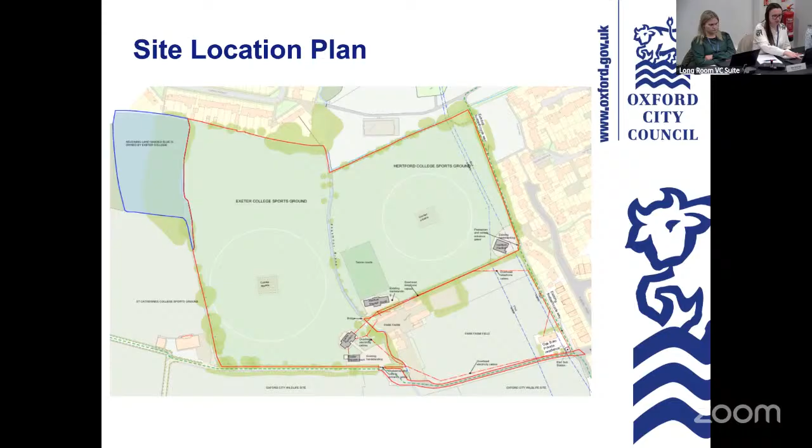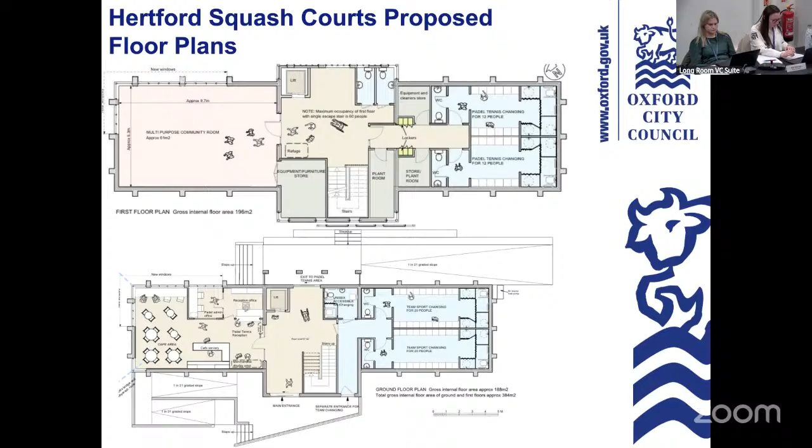So now coming to the proposed floor plans for the Hertford squash courts. The building is proposed to be refurbished with the squash courts being removed and replaced with a cafe, changing facilities, sports hub reception area and community space.

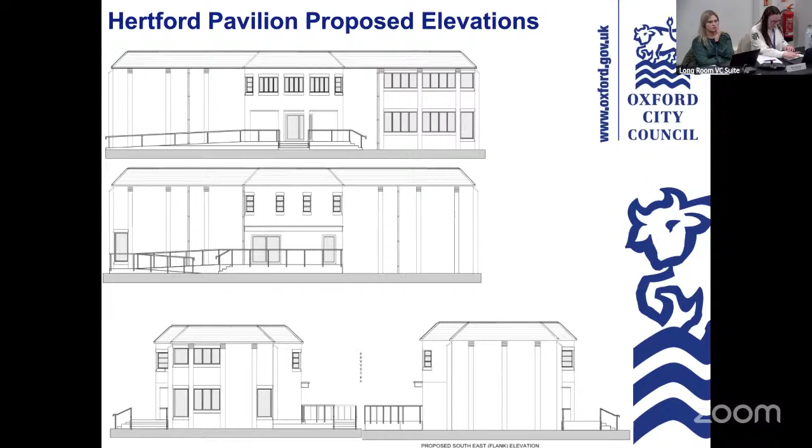And these are the elevations for the same building, with the only new additions being new access steps and ramps proposed outside.

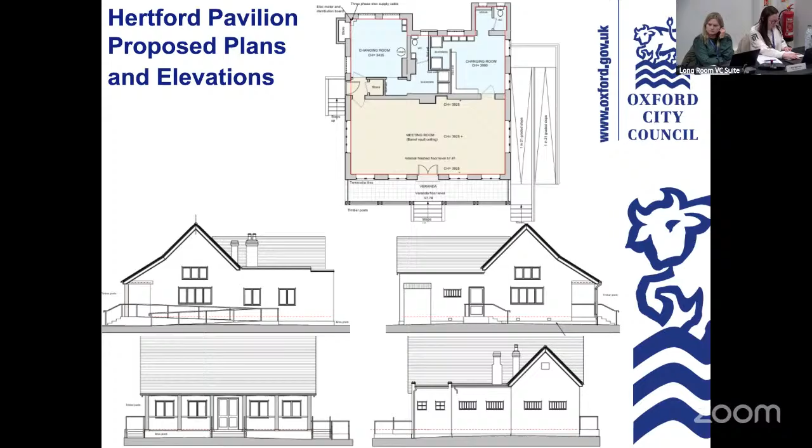These are the proposed floor plans and elevations for the Hertford Pavilion, which is to be refurbished with no alterations proposed to the internal layout nor the use of the building. Ramps and steps are proposed, as well as existing fenestration restored.

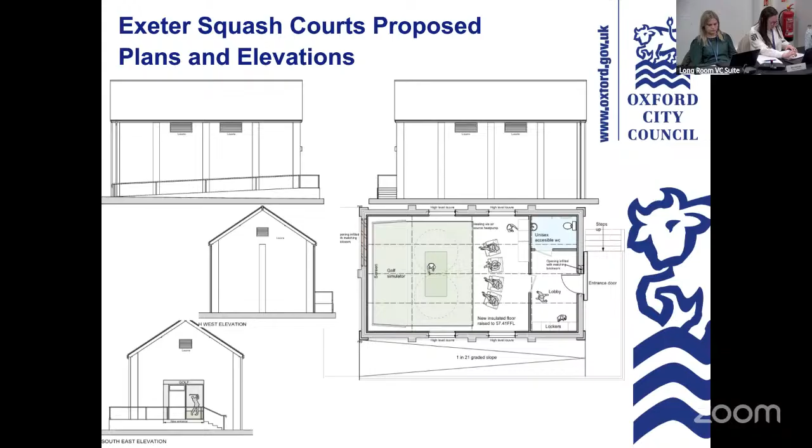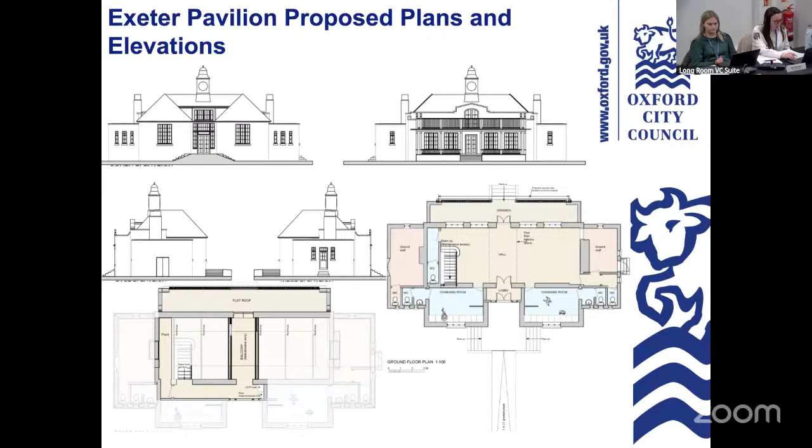Again, ramps and steps are proposed and the existing fenestration would be restored.

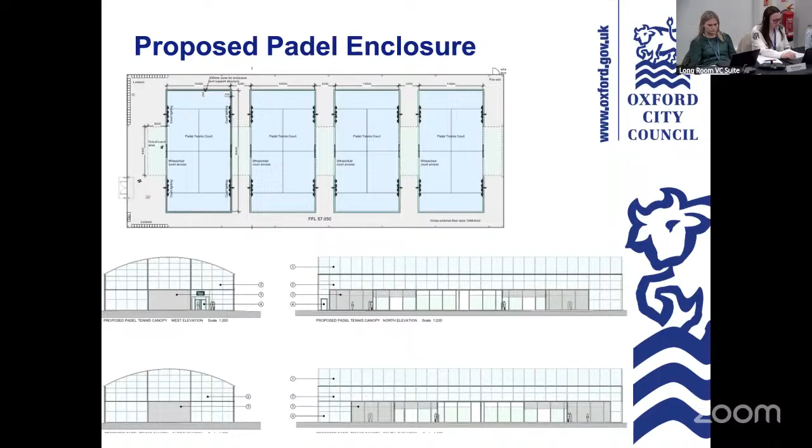The walls and roof of the enclosure would be clad in green polycarbonate sheets.

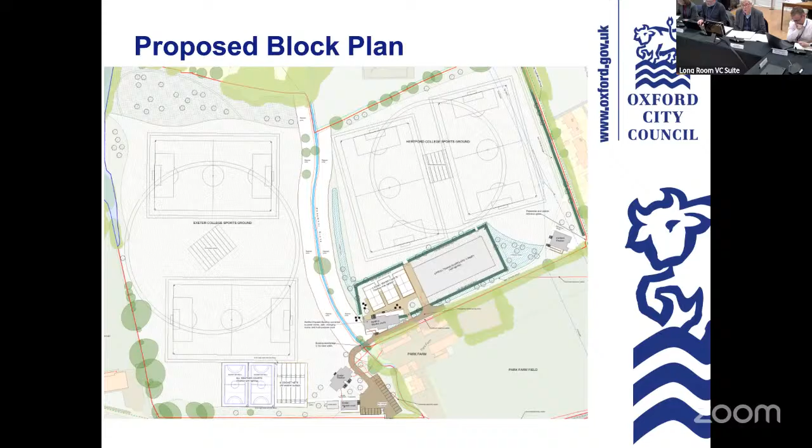So that we have before us a motion to accept the officer's report, i.e. to refuse the application. Could I ask all those in favour of the motion to raise their hand? Okay, that's four.

So, Councillor Henwood, you abstained.

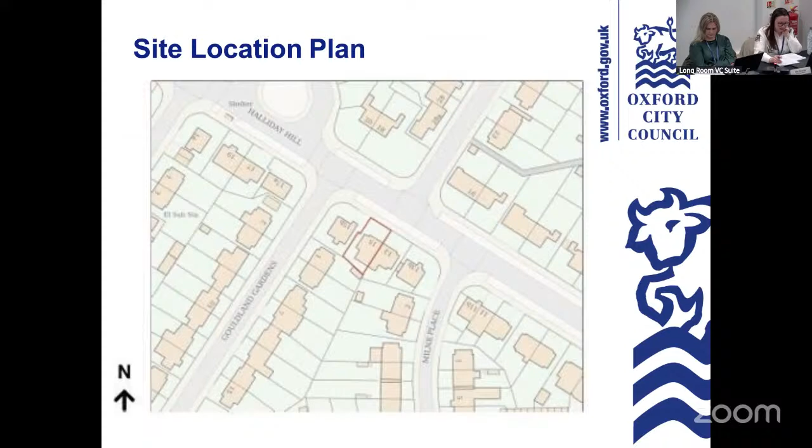These are the existing floor plans showing the ground floor on the left and the first floor on the right.

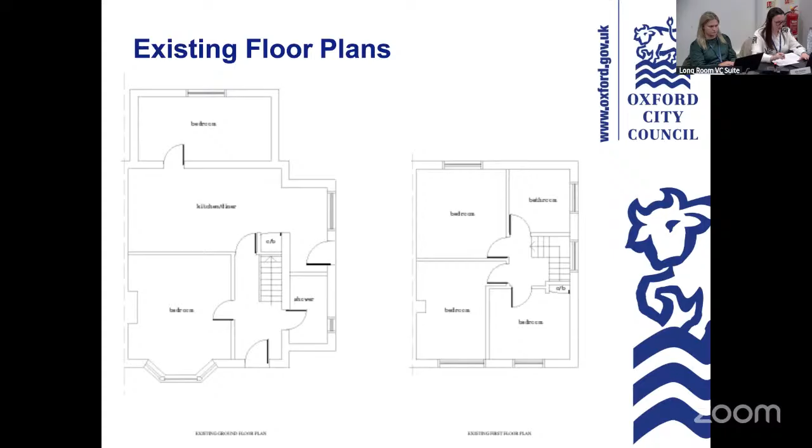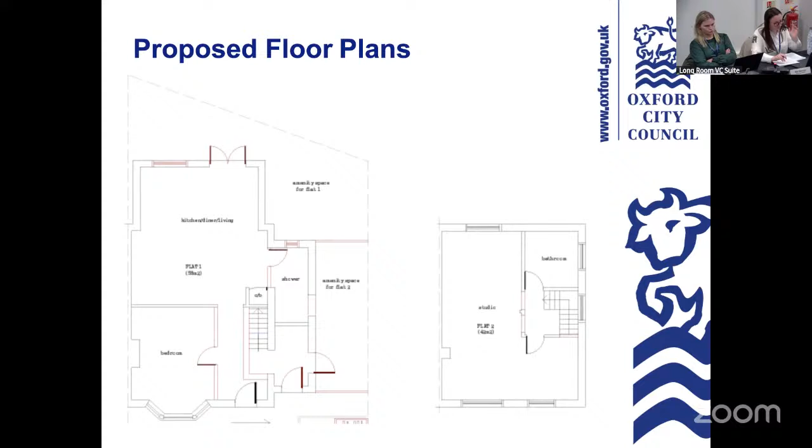These are the proposed floor plans. On the left, on the ground floor, we've got a one-bed flat proposed with private amenity space accessed from the rear. The second flat, located on the first floor, would be accessed at a new secondary door proposed within the front of the existing side projection, and this flat has private amenity space to the side.

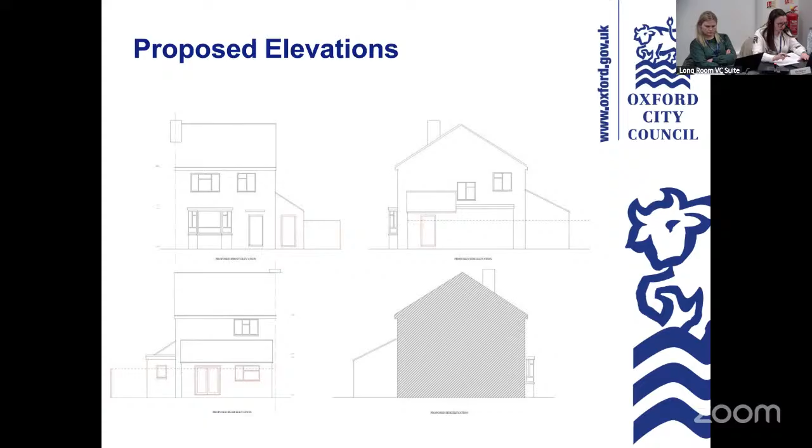In summary, the proposed development is acceptable in principle, providing an additional dwelling, and both dwellings would meet internal and outdoor space requirements, with the design not causing any detrimental harm upon the character and appearance of the dwelling itself, nor the street scene of Halliday Hill.

The proposals would not cause any detrimental impacts upon the amenity of any neighbouring dwellings, nor would the proposals cause any impacts in regards to highway safety, vehicle and bicycle parking, bin storage, drainage, ecology, nor land quality. As such, the proposals are considered to comply with the relevant policies of the Oxford Local Plan and the NPPF.

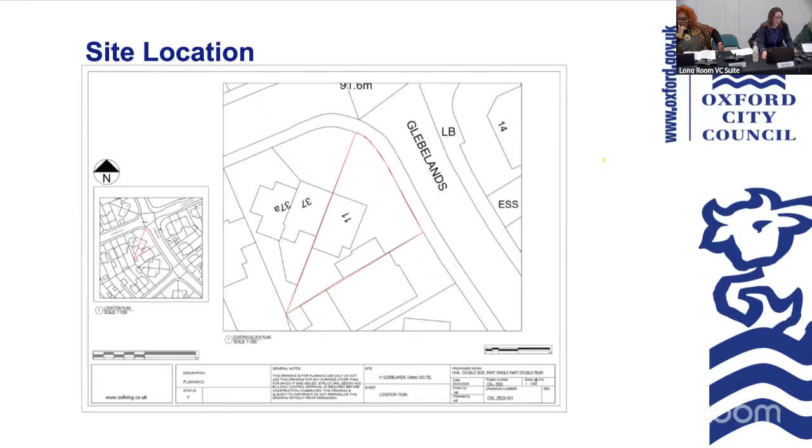The property was originally semi-detached. However, the other half of the semi-detached pair, 37 Coverley Road, has extended with a two-storey side extension, and this is now numbered as a separate dwelling. As such, the application is now part of a short terrace of 3.

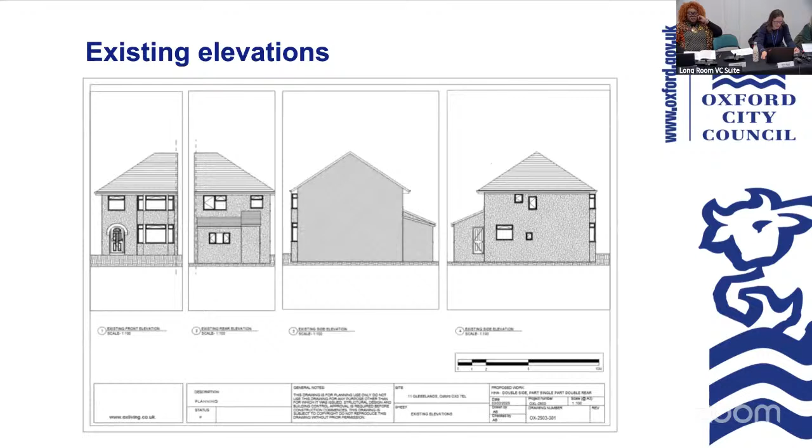The 2-storey side extension will be clearly visible from the street scene and would reduce the openness currently available between the site and 9 Glebelands to the south side. However, consideration has been given to other corner plot dwellings in the area which have similar orientations to the road and placement within their plots, and many properties have extended to the side in a similar manner, including the attached dwelling at 37 Coverley Road. Therefore the proposal is not considered out of keeping with the character and appearance or wider context of the area and would be in accordance with development plan policies.

The 45-25 guidelines have been applied in relation to neighbouring amenity, and the proposed extension would not contravene this code of practice. Therefore it's considered the proposed extensions would not result in loss of light to neighbours.

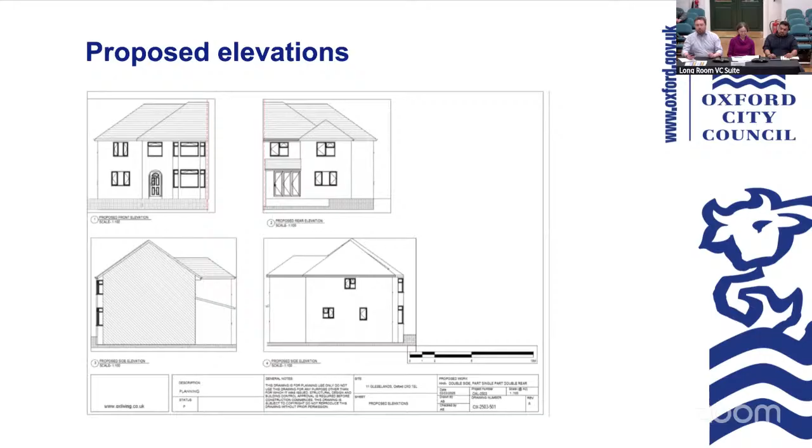My name is James Henton, I'm a resident next door to the property at 11 Gleeblands. We feel this is a huge overdevelopment of the site for a number of reasons. We believe this double-storey extension will affect the light coming into the back of our property due to how far the overall property sits in the plot. It sits very far back, so the front garden is huge but the rear garden is very small. We believe having 6 people living in this property with such a small rear garden creates a courtyarding effect for 5 properties backing onto this garden. We feel having this small amount of space for 6 people, let alone the 8 bedrooms proposed on the plan, would be unacceptable and not create enough amenity. There are 6 bedrooms listed, but 8 bedrooms are going to be within this proposal, so we feel this is a way for the property developer to get through additional bedrooms without effective planning under the sui generis guidelines.

All of these bedrooms will also have ensuite facilities. Those showers will back onto our bedrooms on our adjoining wall. We feel that even with sufficient noise reduction, this would still cause big disturbance to us as residents. Also, as these all have en suites, this is an irreversible plan which can never go back to a family home should they want to sell in the future.

I'd like to point out that a 5-bed plan has been submitted and approved without these additional extensions, and would be more in keeping with the neighbourhood and residents. I believe it's not necessarily about the process you follow, it's how you make your customer feel. We have a 300-person signature petition against this application, and I feel ignoring the community of Lye Valley is a big mistake.

Looking at Gleeblands on its own, both number 5 and 8 have already been approved for 8 and 9-bed properties and are currently inhabited. Number 11 and number 17, currently under review, given these were 3-bed properties, in 150 yards you are changing 12 bedrooms to 32. I believe that is completely unacceptable in terms of amenities for the local community, traffic, drainage, and everything else. Thank you.

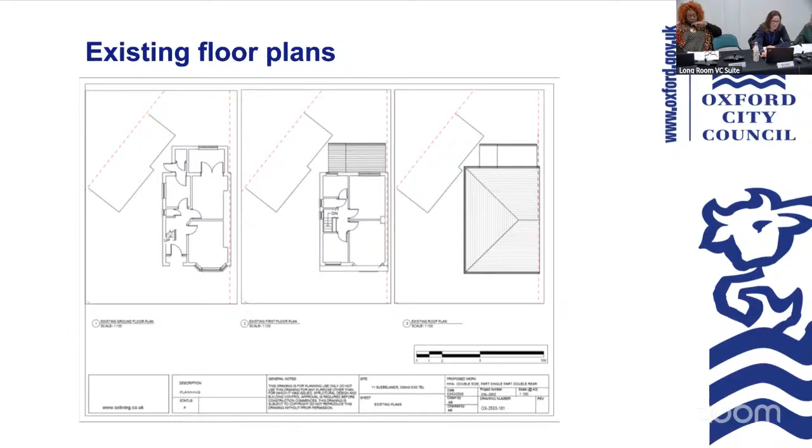Do you want to come back on that one, Mary? The current application is for a residential extension. There was a previous extension for a small HMO, but this current application hasn't been implemented yet. So this current application is for a residential extension. The other areas in the house are extended as existing: living room, kitchen.

Chair, just to come in. I think you're talking about that proposed floor plan, where there are bedrooms shown on the first floor and one on the ground floor, and then there's space that's not demarcated. Is that the concern? They don't have to specify what's actually going in those rooms, but one would expect that they're not bedrooms, so it's like living room, kitchen, diner. I would have thought the applicants... they're online, isn't it? You can ask that question if you see fit.

The point we're trying to make is that this is a C3 dwelling house at the current time. Although it's got planning permission for an HMO, that has not been implemented as yet. Therefore, we're looking at the extension itself here and not the use of the property. If the property later wants to be used as a C4 HMO, the applicant will need to apply for that change of use.

Do you want to come back, Simon? I don't understand that. Does that mean nobody will be able to live in it? No, that doesn't mean nobody will be able to live in it. At the moment, if they extend the property, if this planning permission gets granted and they build this extension, they will have to use it as a C3 dwelling house. That means used by a family that could have 6 bedrooms with en suites.

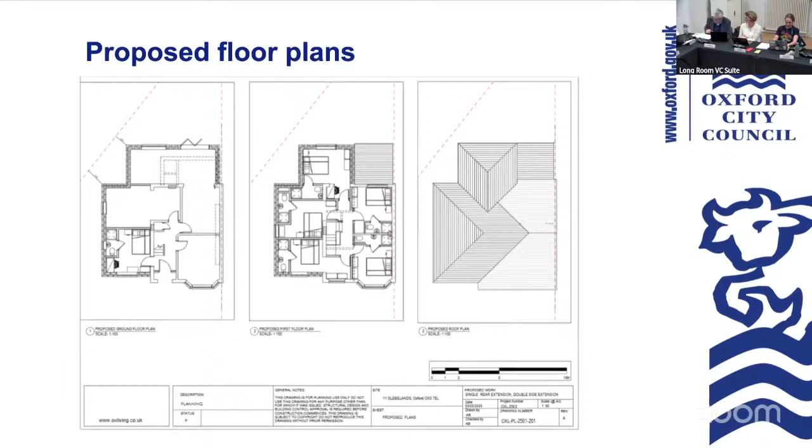I did have a question about the HMO thing. Could I just quickly check, is the number of HMOs in a given area a planning issue or a licensing issue? I don't believe it's a licensing issue, because the license goes with the property, and whether the property can be used as a HMO depends on meeting a certain set of standards. The number of HMOs in the area is a material planning consideration, because we have a policy controlling that.

But that applies when you're considering an application for a HMO. The important thing to remember here - and maybe we can seek clarification from the applicant to confirm - is that the property is currently in use as a C3 dwelling house. If at such time you're looking at the change of use of the property to a HMO, that's when you consider the saturation policy.

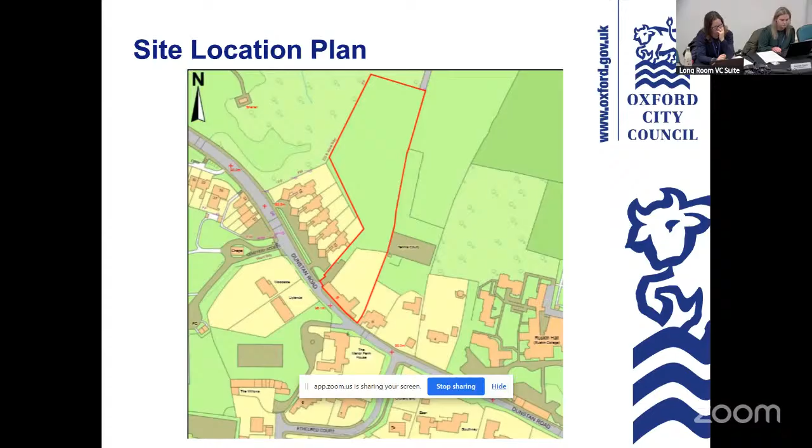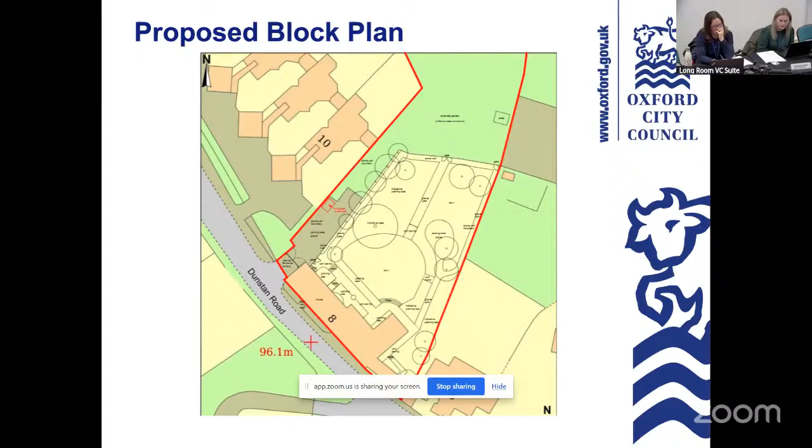So this is the block plan. Here to the left of the main dwelling, or to the northwest, is where the proposed bike shed is located. To the west of the main dwelling, still within the red line boundary, is a vehicle access gate, and the proposed shed is located behind this gate to the northwest side of the site boundary, and the shed would be accessed via this gate.

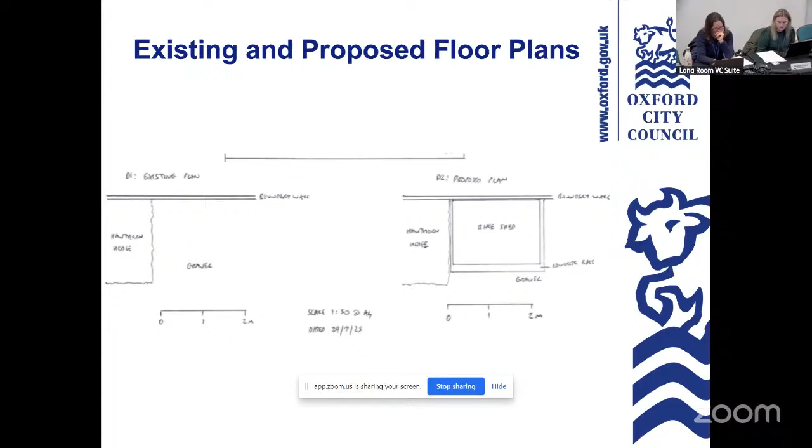The main considerations of the proposal were the design and heritage impact and compliance with cycling standards. The structure wouldn't be visible from Dunstan Road nor the listed building unless the access gates were left open. It could be easily removed if required, and it's of a very modest design. Therefore, we're of the view that the design is acceptable and that it wouldn't impact the Grade 2 listed heritage asset opposite. Our heritage team have reviewed the proposal and are also in agreement that it would not impact the listed building nor the conservation area.

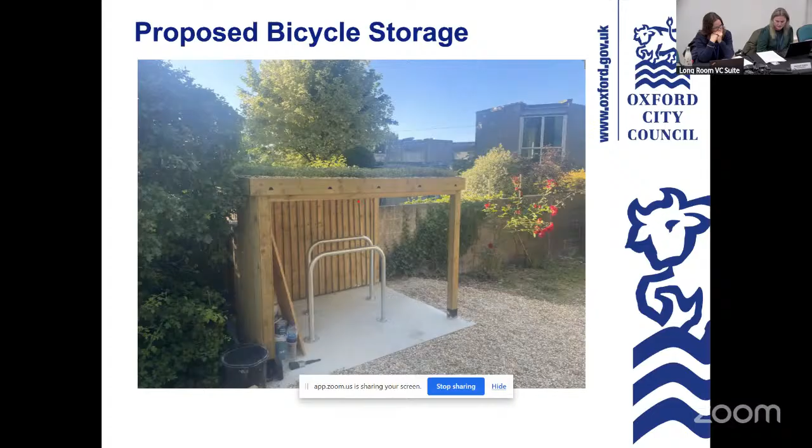No representations were received from members of the public nor any statutory consultees. Here is another photograph of the bike shed. Whilst it isn't enclosed, it's considered to be sufficiently secure because of the vehicle access gates. The proposal meets the cycling storage standards required by policy. Overall, the proposal would comply with the relevant policies of the local plan and the Headington Neighbourhood Plan, and therefore we recommend the application be approved.

Thank you, Hannah. Any questions from the committee to the officers? Nothing on that. Then we'll proceed to any comments anybody would like to make.

Councillor Henwood: it's very sensible. Seconded. Councillor Railton: Yes, I'll just say it is a very jolly looking bike shed. I am worried that the spacing of those two Sheffield stands is not LTN 1/20 compliant. That's not 1.2 metres, but I think it's fine. Yes, that had occurred to me to ask, but as it's private...

So we have a proposal to accept the officer's report on the table. Is there a seconder? Yes, thank you, Councillor Kerr. So we can just proceed straight to the vote to accept the officer's report. And I think that's unanimous. Thank you.